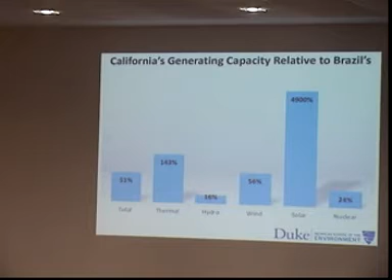Now, this is a typical day in the CAISO about a year ago, March 1st, 2017, and the top figure that you see here is the amount of renewable energy generated over the course of that day. You can see that it includes geothermal, biomass, biogas, small hydro, and wind, but the vast majority of it is solar. Now, as you're well aware, this is non-dispatchable, so they treat it as a reduction in the total load, which is represented by this black line that you see. So you're left with this dashed line, which is the net load that has to be met, in this case, by nuclear, large hydro, thermal, and imports from outside of the state.

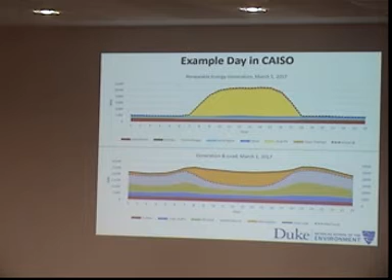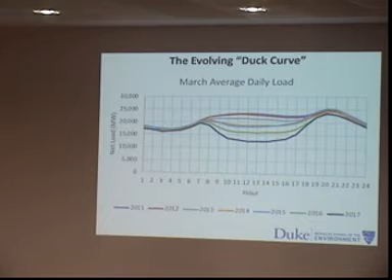Now, this net load curve, as Dr. Mooney mentioned in yesterday's talk, has been changing rapidly, giving rise to the duck curve that you've heard about repeatedly. And this is a depiction of essentially the net load curve between 2011 and 2017 for an average day in March. And you can see that over the course of these 6 years, the midday net load has dropped by some 10 gigawatts. As a result, you have a 7 gigawatt ramp down from the early morning hours to the midday, and then a 10 gigawatt ramp up from midday till about 10 o'clock at night.

Now, this 10 gigawatt drop in net load in midday is a consequence of just a 15% increase in renewable energy since 2011, between 2011 and 2017. And this renewable energy is projected to grow. We'll talk more about this in a minute.

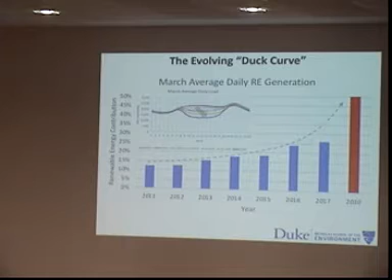Now, what you're seeing here today is likely to be amplified given California's goals moving forward. And there's two major ones at play here. The first is that California already has 30% on average renewable energy as a fraction of the load that's generated. And the goal is to reach 33% by 2020 and 50% by 2030.

At the same time, as part of the state's plan to reduce its greenhouse gas emissions 40% below 1990 levels, it is planning to reduce its greenhouse gas emissions from the electric sector by 50% since 2015. So these are very aggressive goals that are driving a lot of the change that you see happening in the state.

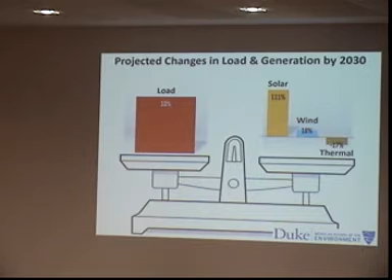So, not knowing what the future holds, of course, if we take the load and generation in 2017 and scale it up to the 2030 projection, so increase the load by 10%, double the amount of solar, reduce the thermal by some 20%, increase the wind by 20%, we end up with this set of curves that you see here. So the gray line is the total load.

The blue line that you see represents the reduction in this total load by the deployment of more behind the meter solar. So this is solar that's used on site, solar that does not need to be generated by the utilities. And then this yellow curve would be the in front of the meter solar, the amount of solar that would presumably be sold. So if you take this yellow curve and subtract it from this blue curve, this is what your net profile looks like, which is quite exaggerated.

Right? You see that rather than a ramp down of 7 gigawatts, we're now ramping down over 21 gigawatts. And rather than increasing 10, we're ramping up 30. And clearly, this type of setup would cause all sorts of problems. You would have these very large ramp rates, and without some way other than thermal to dispatch the power to meet the ramp rates, greenhouse gas emissions will increase during this time, which offsets what they're trying to do with their emissions.

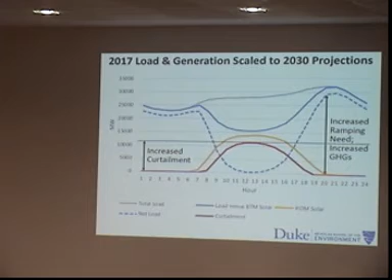And at the same time, if you have an inflexible level of load, your curtailments could rise from a fraction of a percent of the total load to some 10 to 20% of the total load. So this is the challenge that California is facing in trying to meet its goals. Which brings me to the Clean Peak Standard, which is the proposal for how to potentially deal with this.

In this proposal, the idea is that you would take clean energy from earlier in the day and dispatch it during a period. A lot of times this is viewed as a 4-hour period. Here I'm showing it as a 5-hour period. We've been looking at it in terms of dispatching clean energy between 5 o'clock at night and 10 o'clock at night. And this clean energy has to represent 40% of the total load that you see up here. Okay. And yet it needs to happen over what I'll refer to as Clean Peak Standard hours.

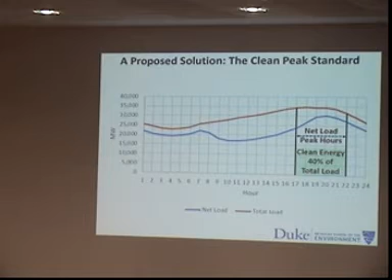Now, this type of proposal is well suited for energy storage because this type of storage is perfect for load shifting. You can basically store energy that might have been curtailed, as well as energy produced during times of low demand, and then discharge it again during the Clean Peak Standard hours. Now, one of the things I want you to notice with this proposal, however, is that during these Clean Peak Standard hours, you still have renewable energy that's being generated.

That's the gap between the blue curve and the orange curve. So the 40% of clean energy that needs to be met, some of it will be met by renewable energy. So that reduces the amount that has to happen from storage.

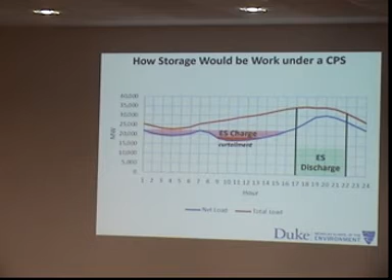Now, one of the things I want you to notice is that there are days when no storage is needed. In other words, you're going to meet the 40% just by renewable energy. But as we'll see, that doesn't address the more amplified dip in the middle of the day. So you're still left with that issue.

Now, one of the main reasons behind this seasonal variation in the amount of energy storage that's needed has to do with essentially the amount and shape of the load as well as the amount and shape of the resource. So in these graphs, the top is total load, the middle is wind and solar estimated for these days, and the bottom is the difference between the two, the net load. And the blue curve represents winter, yellow summer, fall is the brownish, and green is spring.

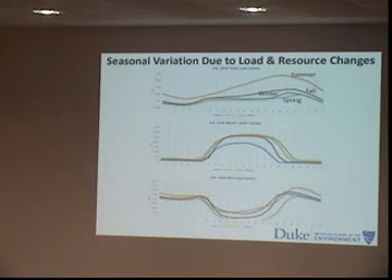So for example, if we look at spring, this is a time when you have a net load curve which would effectively, for this 2030 projection, which again is a significant estimate, you would basically be generating more energy than was required by the entire grid.

Now we can take this curve and essentially create a cumulative histogram of how much storage would be needed for any fraction of the year. And that's what you're looking at in this graph right here, the orange. So here's the amount of storage. Here's the fraction of the year that it would be needed on the left, what you see here.

Now, what I want you to notice is yesterday when we were hearing from Dr. Gravely about the mandate for storage in California, he mentioned that the mandate is a historic almost 2 gigawatt level. Well, here's the 2 gigawatts versus what would potentially be needed, ultimately 35 gigawatts, to meet the Clean Peak standard, if you did it by storage, for the day when the most storage is needed.

Right? The other thing that I want to point out here is that the inverse of this orange curve effectively represents the capacity factor for the different levels of storage. And you can see that at low levels of storage, essentially you would be using it about 2/3 of the year. But clearly, as you go to high levels of storage, you drop to 1% or less.

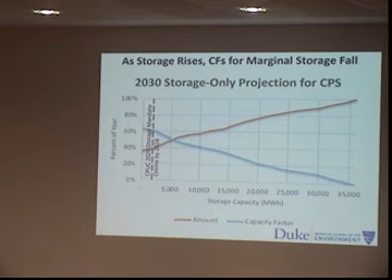So, for example, we heard about the PPA for Kauai with AES at about $111 per megawatt hour. This is for a battery system that has a capacity of 20 megawatts and energy capacity of 100 megawatt hours for about an equivalent size solar system. That was in January of 2017.

In May 2017, NextEra signed this PPA with Tucson Electric, which we also heard about yesterday, at less than $45 a megawatt hour, which they estimate without subsidies is probably more like $90 a megawatt hour. Again, we have a 100 megawatt solar plant, 30 megawatt battery with 120 megawatt hour energy capacity.

And then more recently, just last month, First Solar and APS signed a PPA for a 65 megawatt solar plant with a battery that had a 50 megawatt capacity and a 200 megawatt hour battery. Now, what's interesting about this contract, which is for 15 years, and we don't know what the price is, but supposedly it's competitive with this price here, is that this system will deliver 50 megawatts every hour over a 4-hour period. In other words, basically discharge for over this energy capacity.

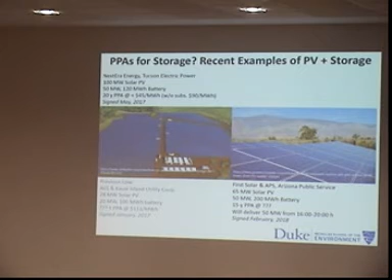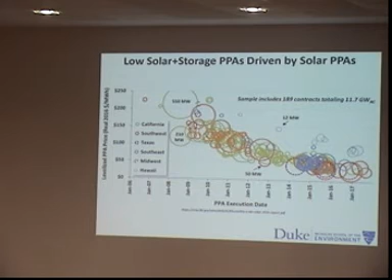Now, one of the big reasons why these PPAs are so low for the storage plus solar is because of the PPAs that solar are receiving. You can see here that as of last year, this is produced by Lawrence Berkeley Labs, their annual assessment of PPAs for the solar industry. You can see that they're basically at the kind of 3 cent per kilowatt hour level, quite remarkably low rather.

And so what I'm going to try and do in the remainder of this talk is isolate what the PPA would need to be for the battery. And I'm going to do this with a very simple IRR analysis in which I'm going to essentially vary the PPA rate and the costs. Those will be the two numbers that I change. And I'm just going to basically calculate a cash flow and the subsequent IRR based on the revenue earned by the storage, given the PPA, adjusted for just simply O&M costs and taking into account depreciation and taxes.

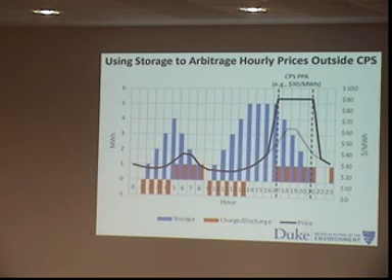What I've done is to just also look at whether or not you could use the storage to arbitrage the hourly price. So what you're looking at here, I've got a 5 megawatt hour system that can discharge and charge at 1 megawatt. And so in the early morning hours, when prices are low, the battery stores, and then it discharges during that ramp down. And then it charges again when it's low, and discharges during the clean peak standard hours when it's supposed to discharge. And at this point, it's actually receiving that PPA price. Otherwise, it's receiving what the price of the market has.

So I think the bottom line that I'm trying to leave you with here is that it's extremely hard to make it be economic for storage just using it to meet the clean peak standard. There has to be another way that you earn income. The problem here is a couple of things that I'll mention in closing.

One is that in the arbitrage case that I just showed you, you basically don't have a guarantee that you're going to make that particular price. And a lot of these contracts, essentially financial arrangements for making these large wind farms, including the ones with storage, require some sort of fixed revenue. That's why the PPA is there. And so I'm not sure that the arbitrage that I modeled here really fits the needed financial model.

The second thing is that as we move forward, the storage is likely going to have to be added to only new PV. And the reason for this is because a lot of the existing solar systems that have been set up have received much higher PPAs in the past than are being offered right now. And if they try and renegotiate the PPA to include storage, they're not going to get this high price. It's going to be somewhere down here. And so all of this addition of storage is probably going to have to come from new solar.